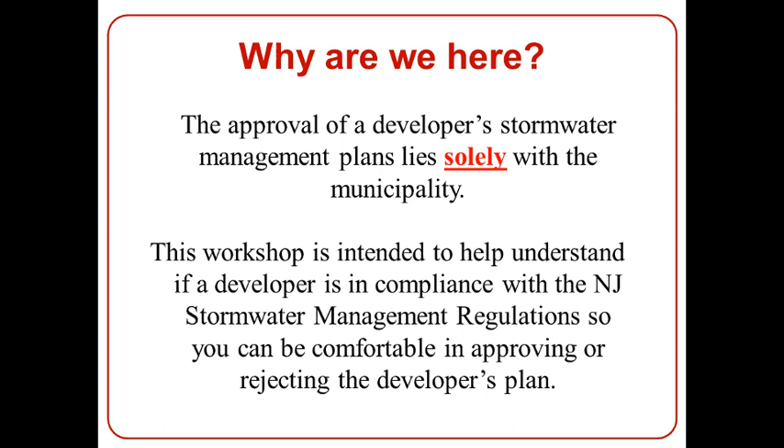Like I said, I'm with Rutgers Cooperative Extension. We've been around for about 100 years. Rutgers University is a land-grant college for the state of New Jersey. That's something Abraham Lincoln created in the 1860s. They gave large chunks of land to universities across the country so they could better teach agricultural and mechanical arts. Rutgers competed against Princeton, and not only did we beat them in the first football game, we beat them out on this too and became the land-grant university.

About 20 years later, we realized that we did not know how to be better farmers, so we started the Agriculture Experiment Station so we can do research on how to be better farmers. And then around 1914, we realized most farmers don't go to college, they farm, so we formed the Cooperative Extension Service. The idea is to extend the knowledge of the university out to the people of the state.

We have an office in every county, and the idea is that you can go to the county office. If you were a farmer and had a bug on your potato, you could go to the county office, and that county agent would explain to you how to deal with that. If they didn't know, they would come to the university, and we would do research and figure out how to deal with the problem. Now, over the years, we stopped growing corn and started growing houses, so now we're more of an urban-suburban as well as agricultural cooperative extension service. So we serve all of New Jersey, not just the farmers.

I came to Rutgers about 17 years ago, and I started the Water Resources Program. Our mission is to identify and address community water resources issues using sustainable and practical science-based solutions. As you know, every mission statement must have as many buzzwords as possible in it, and that has them all.

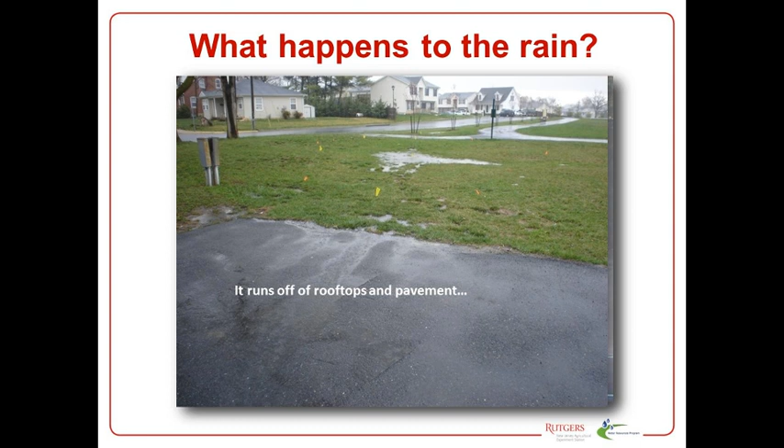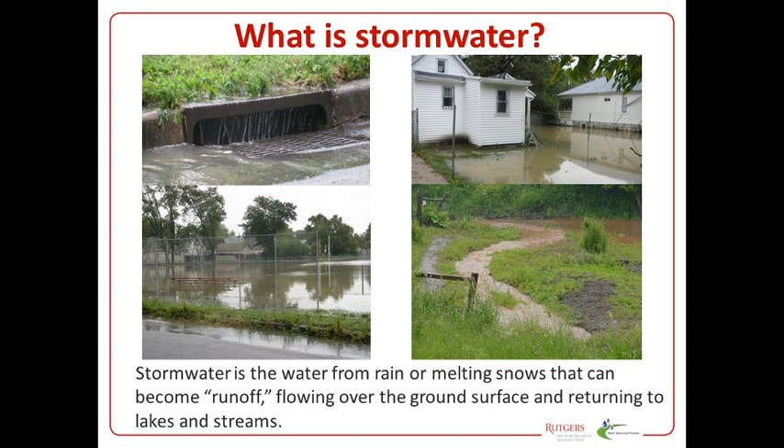Stormwater runoff is basically water from the rain or melting snow. That little stream in the lower right-hand corner is a little tributary by my house in Hillsborough. It's usually a little trickle of water unless we get a little bit of rain - then it becomes this muddy mess carrying water out to the Royce Brook. These are things we're trying to avoid.

We talk a lot about the hydrologic cycle, the water cycle. Our kids learn this in 4th grade - they learn about how water is cycled through this cycle. We can't create or destroy water; it's just there, transforming how it appears in our environment. We often explain to the kids that the water they're drinking is the same water the dinosaurs peed in millions of years ago, and kids tend to get a kick out of that.

But we've changed this water cycle. We've added lots of development. Under a natural, wooded, forested condition, we get about 10% stormwater runoff. As we add single-family homes on 1-2 acre lots, we get about 20% runoff. As we add more dense development, quarter-acre or half-acre lots, we get 30% stormwater runoff. And then when we get to downtown New Brunswick or some of our bigger cities, we get about 55% runoff.

New Jersey gets on average about 44 to 45 inches of rain a year. The climate is changing - that's real, it's not a myth. And that number is expected to go up to 48 to maybe 50 inches a year as climate continues to change. So we will get more water in New Jersey.

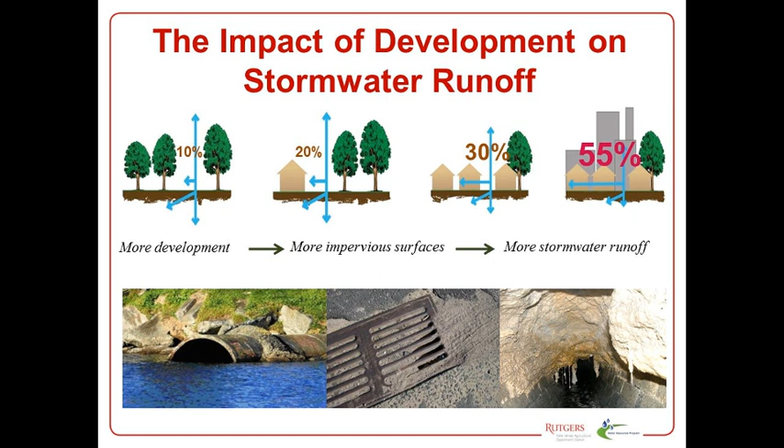As we add more impervious surfaces, we get more stormwater runoff. An impervious surface is any surface that water won't pass through - the roof of a building, a roadway, parking lot, sidewalks, even the very compacted lawns we see in some retirement communities along the Jersey Shore. Although it looks like grass, it's so compacted water can't get through, so it effectively becomes an impervious surface. This is something we really worry about, because impervious surfaces provide areas for pollutants to accumulate, and when it rains, it carries this pollution off.

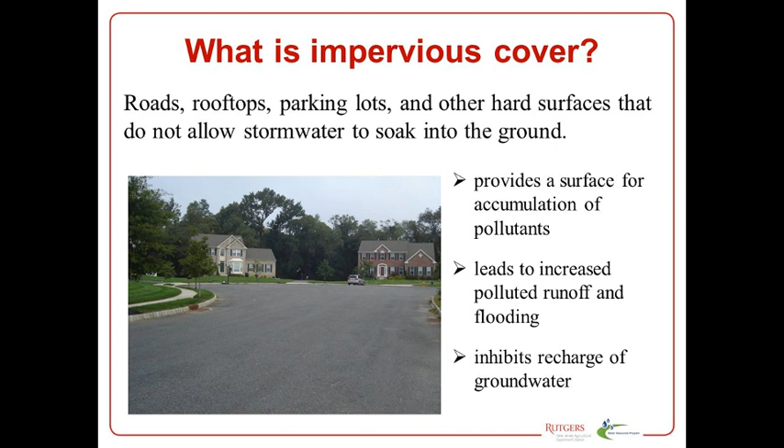Also, very importantly, it inhibits groundwater recharge. About 50% of the water we use in this state comes from the ground, so we're trying to get water back in the ground. If we don't get water back in the ground, we don't have water to irrigate our crops, we don't have water to drink, and we don't have water to feed our streams in the summer months when it gets very hot and we don't get a lot of rain. So that's very important to think about.

So as we change our landscape, we add more impervious cover. These are some of the things we see: more stormwater runoff volumes, higher peak flows, a lot more non-point source pollution, which is pollution that runs off the land, and less groundwater recharge. So these are things we're trying to avoid.

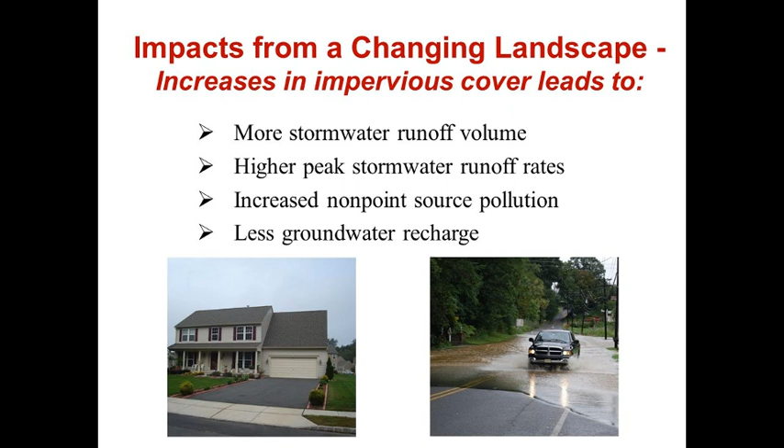So by adding those impervious surfaces, we've created a new water cycle, an urban water cycle. We get much less infiltration and much more stormwater runoff. And now we're trying to figure out through stormwater management how we can reduce that runoff and get more infiltration into the ground.

And that's a lot of what our stormwater regulations are written about. The current regulations were passed in 2004. There are new regulations expected to come out after the new year. They're the same requirements in the regulations. The only difference is how we're going to manage stormwater. They're going to require more green infrastructure to be used to manage stormwater, so things aren't going to change all that much except for the practices that are put in place to manage the runoff.

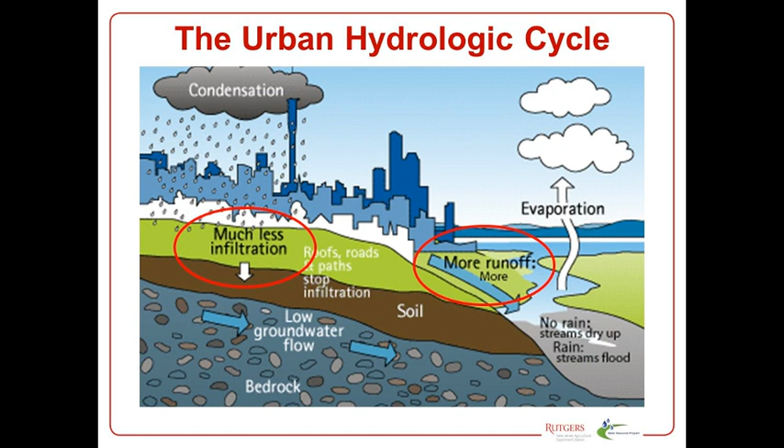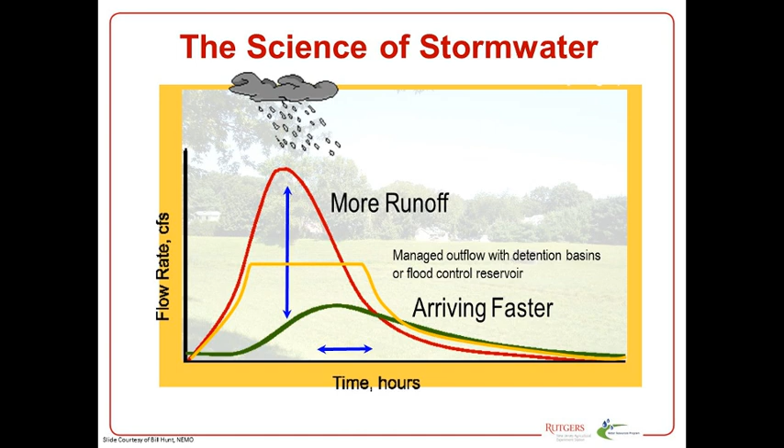Okay, so I think we're okay, right?

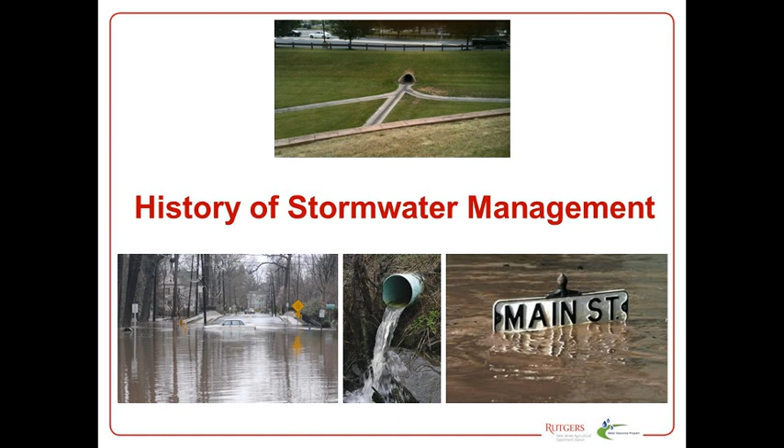It doesn't take much water to flood those bridges out, but 2 or 3 inches of rain and you see cars floating away. It's not unusual in New Jersey, okay?

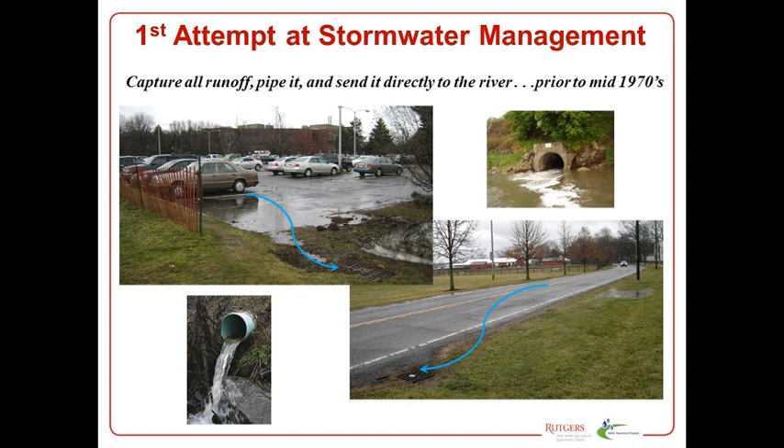So the first attempt at stormwater management was to grab the water and throw it in a catch basin and pipe it into the river directly. There's no storage, there's no holding it back. Let's hurry it downstream and let the next town downstream worry about it. So if you're in Hillsborough or Montgomery Township in Somerset County, we let Manville worry about it, or Bound Brook. So this was the original concept: hurry up and get it away, taking into no account what our downstream neighbor might experience because of our stormwater runoff and how we manage it. That's part of the issue.

The second iteration, we decided to create these big, beautiful detention basins. The idea of a detention basin was to grab all the stormwater runoff, hold it, and let it out slowly. So we took a 50-acre farm or 50-acre woodland, put houses on it with lots of pavement and rooftops, increased the amount of stormwater running off that area, and then put it in the basin and let it out slowly.

So the basin does not infiltrate stormwater. Most of these basins are very compacted, so very little water gets infiltrated. It just holds the water and lets it out slowly to prevent that peak from flooding downstream.

Most of these basins are designed for the 100-year storm, which is about 8 inches of rain over 24 hours. The 100-year storm does not come once every 100 years; the chance of getting it this year is 1 in 100. It's more of a probability thing. So this is why we get the 100-year storm every few years, because we're just a very unlucky state, I guess.

So the idea with these basins was to hold the water and let it out slowly. Somebody started worrying about mosquitoes, and they said if we have standing water for more than 72 hours, mosquitoes breed, and we'll have serious health effects.

So somebody decided we're going to put in these concrete low-flow channels. The bottom of this basin is graded at about 0.5%. It's very hard to grade soil at 0.5%, but New Jersey is the concrete king of the world, and we can pour concrete at 0.5% all day long. So we pour these little concrete low-flow channels in there.

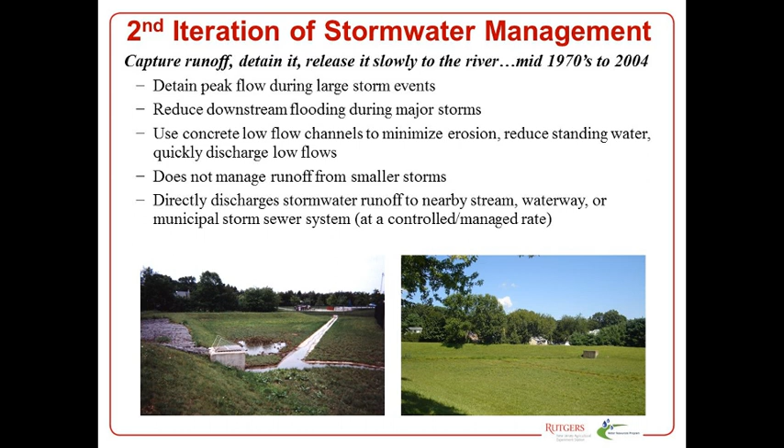So these became a big issue in New Jersey, and a lot of towns are trying to get rid of these right now. So the third iteration came out in 2004.

Regulations came out—there were two sets. There was a stormwater permitting regulation and a stormwater management regulation. The stormwater permitting regulations are often referred to as the Phase 2 regulations, or the MS4 permit.

The four S's: M stands for municipal. The four S's stand for stormwater, storm sewer system, separate storm sewer system. That's the four S's.

So the idea is that every town in New Jersey, all 565 towns, has a permit for their stormwater system—for the piping in the road, the ditches on the side of the road, anything that moves stormwater around their town.

These are the permits that require you to do street sweeping, to clean out your catch basins. These are the permits that require you to adopt a pet waste ordinance and a don't-feed-wildlife ordinance. So these are those ordinances.

The other thing that was passed was stormwater management regulations. The idea with this was that we were required to manage stormwater from any major development. Major development was defined as any development that disturbs more than 1 acre or adds a quarter acre of impervious cover.

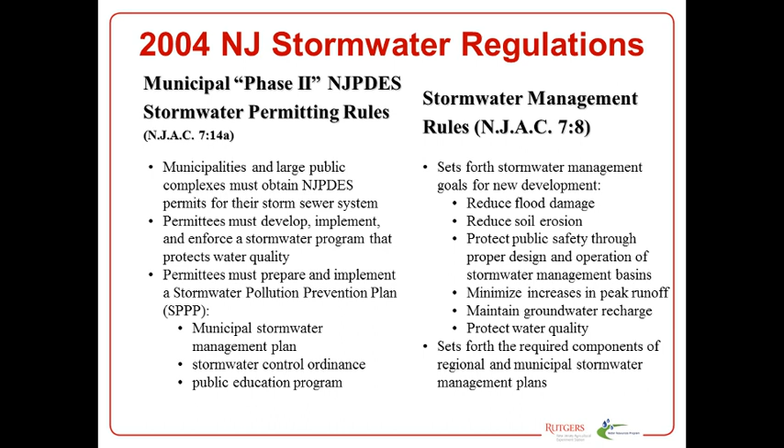But the new regulations do not change the definition of major development. It's still disturbing 1 acre or adding a quarter acre of impervious cover. You're still required to do all the things required in the earlier regulations. The 2020 regulations just ask you to do it a little differently, mainly with green infrastructure, and we'll talk more about that in a minute or two.

So the third generation—this one came out in 2004. Not only are you required to manage these peak flows, but you're required to maintain groundwater recharge and reduce pollution to our local waterways.

The idea was you're required to maintain 100% of your annual average groundwater recharge. So if you had a 50-acre wooded piece of land that was recharging 1 million gallons of stormwater a year, after you put up all your townhouses, it needs to still be recharging 1 million gallons of stormwater a year.

It also requires you to remove 80% of the sediment, the total suspended solids. So any runoff off the property, you have to filter and make sure no sediment leaves the property. So those were the two additions to the regulation.

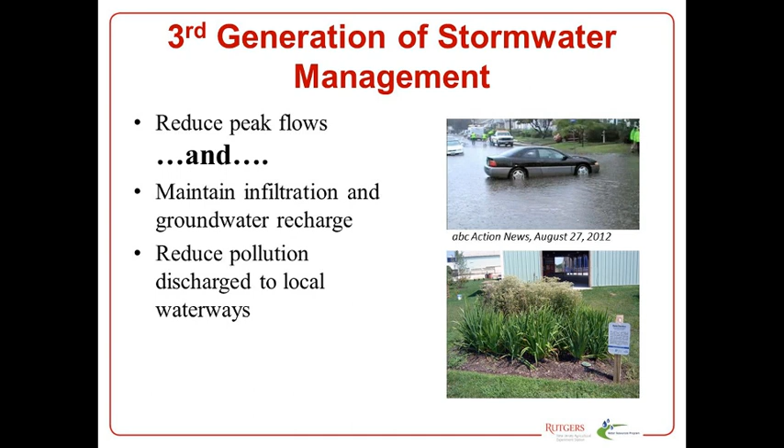So not only just dealing with water quantity, but we're dealing with water quality and groundwater recharge. So how do we do that? Well, we have a video here that kind of shows that.

This is a video from the American Society of Landscape Architects. Hopefully I'll be able to get it to work. So let's see how this works here.

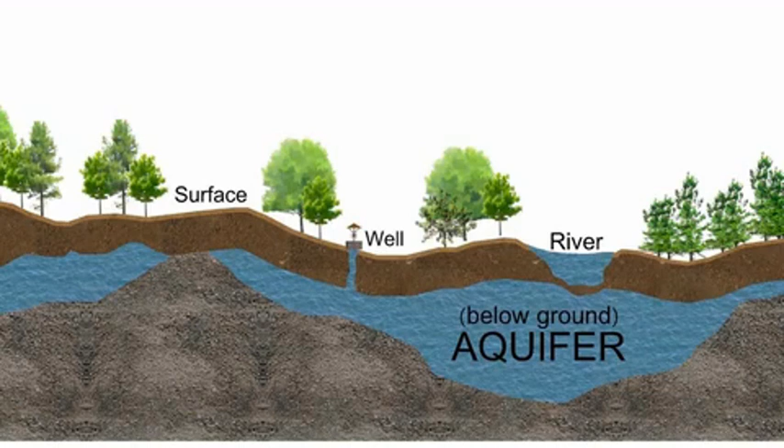Landscape architects design ways to divert and collect rainwater to prevent damage and replenish the aquifer. An aquifer is a below-ground natural reservoir of water that we use for drinking, cooking, bathing, and irrigation. The animation will demonstrate how rainwater is managed on a university campus plaza.

The plaza surface—I guess you guys can't hear that, can you?

Materials: concrete defines the walks and steps, and sod and lawn make up the open space. The building's roof, which also collects and discharges water, is a plain solid surface. Storm sewers and drains are ready to catch and pipe water away from the site and prevent flooding.

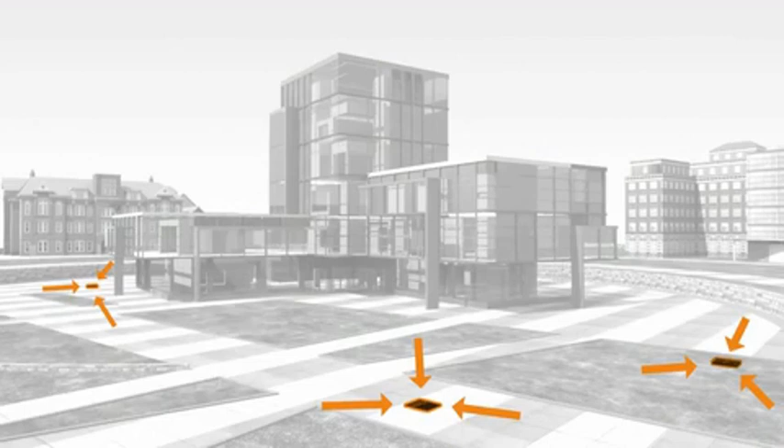Oh, they can hear it?

During heavy rainfall, these materials, like concrete and sod, can only absorb so much water. The excess rainwater on the surface is funneled into the storm sewers.

The building's roof diverts most of its water down pipes into storm drains as well. All this excess water, called runoff, can overtax and cause the storm drains to back up. This causes water to collect in ever-expanding pools. Too much runoff due to heavy rains can cause damage and sometimes catastrophic floods. It also results in more polluted, untreated water entering the aquifer.

There are more effective means to manage stormwater using sustainable systems and materials that prevent flooding and replenish the aquifer. The first system is a green roof placed on top of a building.

The green roof is layered with drainage materials, compost or planting soils, and vegetation. The green roof can absorb some of the rainfall, reducing the amount of water flowing into the storm drains.

Another system involves porous pavement. Concrete surfaces are replaced with individual concrete bricks called pavers. Each paver is interlocked with its neighbor and separated by permeable material. The permeable material is composed of small crushed rocks, also called aggregates.

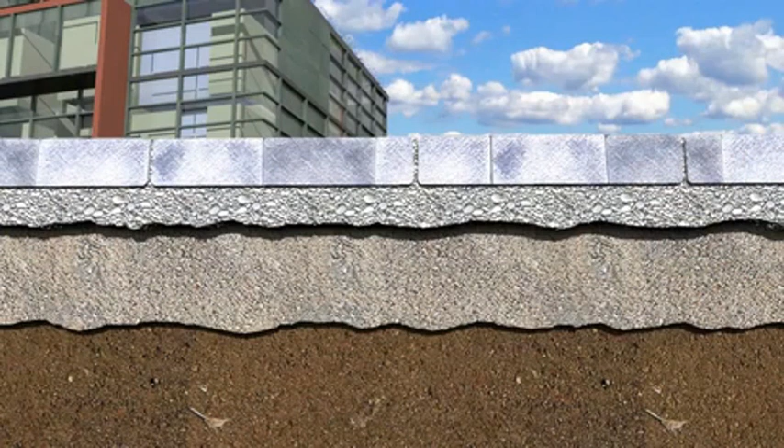Zooming into the cross-section, we see the permeable aggregates between and below the pavers. The aggregate-filled space acts as a sponge, absorbing water downward, diverting a good amount of runoff from the storm drains. The diverted water will eventually make its way into the aquifer below ground.

The third system is called bioretention and is also known as a rain garden. A rain garden is a swale or channel that absorbs, holds, and slowly releases excess water. A rain garden section is composed of compacted soils defining the depth, width, and slope of the swale, sand and drainage materials, plant soils, and vegetation native to the region. Rain gardens are not only aesthetically pleasing, they also restore wildlife habitat.

Now when it rains, water does not collect into large pools. Instead, our three systems absorb and redirect the excess runoff. The green roof prevents a lot of water from entering the storm system or hitting the ground. The porous concrete pavers absorb some of the rainwater and direct it downward into the aquifer. And the rain garden accumulates the remainder of the rainwater, preventing flooding and damage.

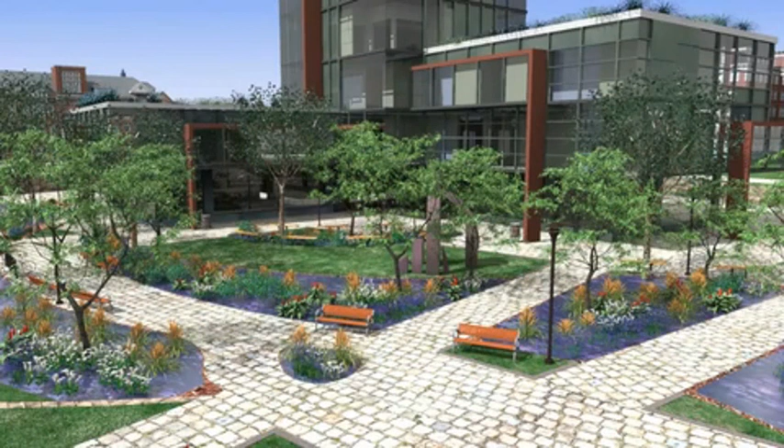As part of its function, the rain garden slowly releases rainwater into the aquifer over a 24-hour period. Just as important, the vegetation acts as a natural water purifier, absorbing pollutants and toxins from the water. Water is in high demand and shortages are common. These three systems are able to capture and treat more water than typical stormwater mechanisms. The systems are effective, easy to implement, and contribute to a more sustainable water management practice.

Okay, let's talk about this video for a second. I know some of you on the phone could not hear it. We will make it available to you to look at.

The whole concept here was that they talk a little bit about how a college campus is typically developed, and the idea is that we can better manage stormwater. So they talk a little bit about a green roof, which is one of the green infrastructure systems that we recommend people use for new development. A green roof will hold about a half inch of rainwater on the roof before it gets to the ground, and the plants on the roof will use that.

It talks about bioretention systems, which are also known as rain gardens. These are landscape features that are actually designed to capture the rainwater that's running off and hold the water and filter the water and infiltrate the water into the ground. And then it talks about permeable pavement. In this case, it talks about the paving stones.

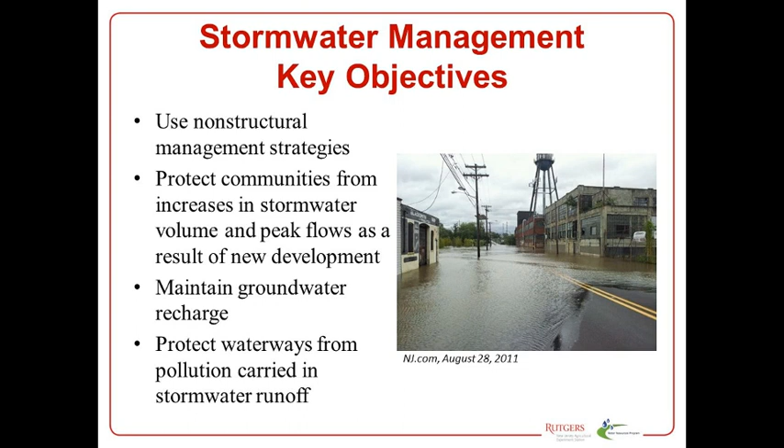So the stormwater management objectives—there were really four objectives with this. One was using non-structural management strategies, thinking about how to better manage the water without having to build too many things. Protecting communities from increases in stormwater, which is really about flooding issues, maintaining groundwater recharge, and also filtering out pollution. That's the other component of the regulations.

None of that has changed with the 2020 requirements. This talks about major development, which we discussed earlier—disturbing 1 acre or more, or increasing impervious area by a quarter acre. If you do that, you have to comply with these regulations. And you'll notice, once again, non-structural strategies, quantity, recharge, and quality.

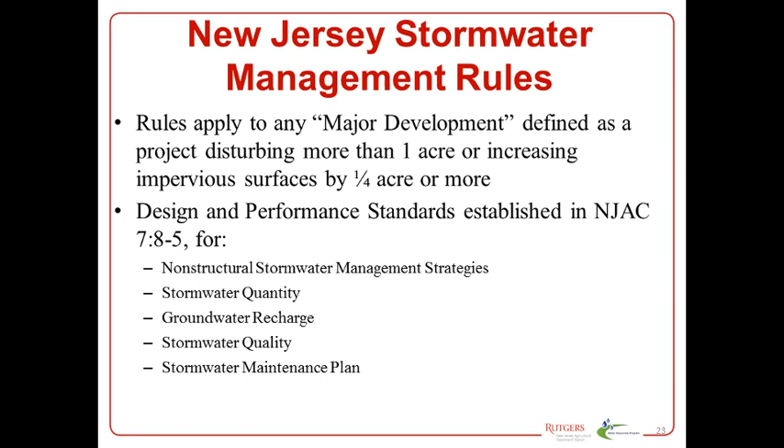The other bullet here is a stormwater maintenance plan. Anything you build to manage stormwater, you have to provide a maintenance plan for, so that whoever owns and operates that facility knows how to take care of it and make sure it's being properly maintained. We know that if things aren't maintained, they tend to stop functioning in every walk of life.

Somebody wants to know, is there a concern in parking lots that allow infiltration that pollutants will be conveyed into the groundwater table? That is a concern at times. Typical parking lots where cars are parked usually aren't too much of a problem—even if cars leak a little oil, usually that's not an issue. We tend not to promote infiltration from very dirty places, like where they keep school buses, or where the Public Works Department keeps their trucks—any older vehicles that might be leaking fluids, or heavy-use vehicles. We do not encourage infiltration from those places.

Actually, it's not allowed in the regulations to infiltrate from those places. So, for example, you're not allowed to infiltrate from a gas station. That's another aspect of it.

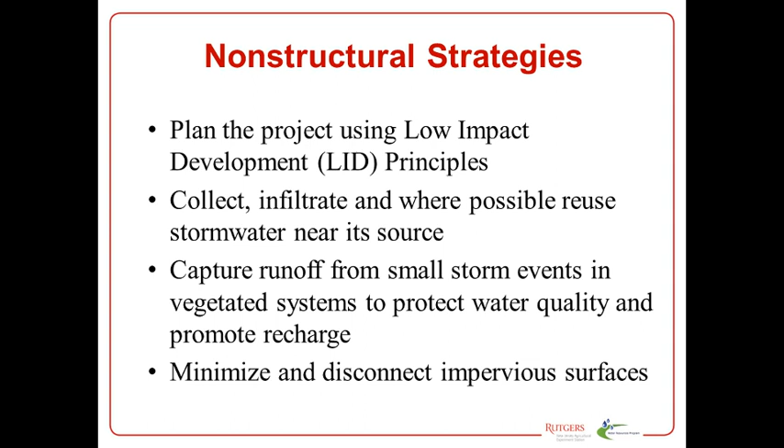Capturing runoff from small events is another issue, using vegetative practices to do that, and minimizing and disconnecting impervious surfaces. We'll talk more about disconnection—it's a very powerful tool that we don't use enough of in New Jersey.

Water quantity regulations have not changed—these have been the regulations since 2004. The idea is we're going to control post-development runoff for the 2-year, 10-year, and 100-year storm events. In other words, we calculate how much stormwater runs off before we develop.

So for the 2-year event, that's about 3.3 inches of rain over 24 hours. A 10-year event is about 5 inches of rain over 24 hours, and the 100-year event is about 8 inches of rain over 24 hours.

So the BMPs for the 2, the 10, and 100-year storm talk about reducing the peak flow. For the 2-year storm, it's a 50% reduction. The 10-year storm is 75% of the peak. And for the 100-year storm, it's 80% of the peak. So for the 100-year storm, if 100 cubic feet per second is your peak flow off the land, after you develop it can only be 80 cubic feet per second. You really have to do a job of managing this.

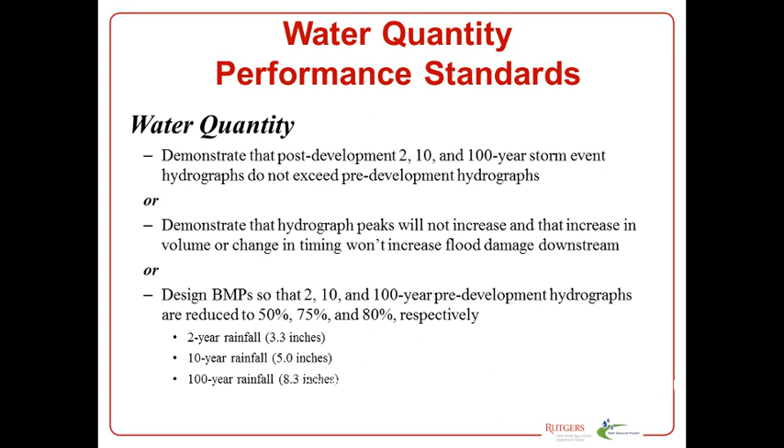There's a lot of questions about green roofs that we'll get into a little bit later as we go on. So, groundwater standards: maintain 100% of your average annual groundwater recharge.

This is a pretty simple thing. If you're recharging 1 million gallons of stormwater before development, afterwards you need to be recharging 1 million gallons of stormwater. The second requirement talks about the 2-year storm, measuring pre-development versus post-development. Usually the second calculation gives you a larger volume of stormwater to recharge, so most people who do these calculations use that first requirement, maintain 100% of their average annual groundwater recharge.

There's a question about whether the developer is held to reduce the peak flow or simply not exceed pre-development. No, they are required to reduce the peak flow. For the 2-year storm, the post-development peak has to be 50% of the pre-development peak. For the 10-year, it has to be 75% of the pre-development peak, and for the 100-year, it has to be 80% of the pre-development peak. So you are reducing it. You've got to keep in mind you're getting a lot more stormwater runoff after post-development because you're adding so much impervious cover.

Another question: do you know the years that most recent rainfall annual increase of 8.3 inches came from? I do not. This is something where the new rainfall totals were calculated by NRCS, the Natural Resource Conservation Service, and the Soil Conservation District. This was done about 10 years ago, and they tried to go back as far as they can, but I think it's probably 30 or 40 years. I'm not really sure what the exact numbers are.

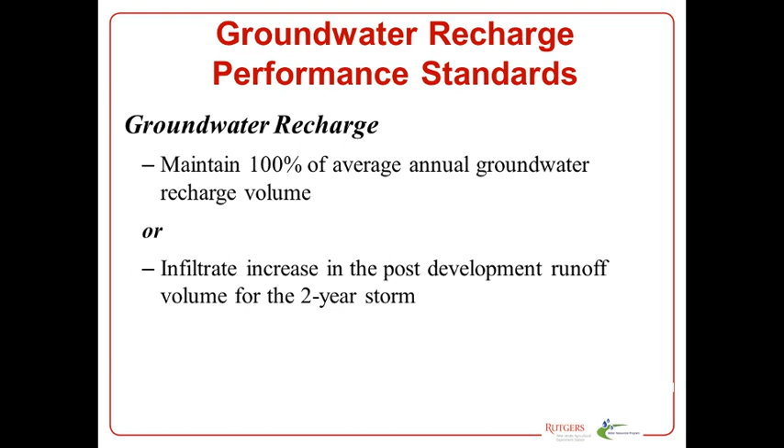So the last one is water quality. You need to install a best management practice to reduce at least 80% of your total suspended solids load, and you must provide nutrient removal to the maximum extent feasible. Originally when they talked about these regulations, they had numbers for how much sediment, nitrogen, phosphorus, lead, and zinc you had to reduce. Then somebody realized that if you design things to remove sediment, it'll also remove all those other things. So the New Jersey DEP came out with a Stormwater Best Management Practice Manual that tells you how to design these different systems, and they rated the systems for how much total suspended solids, or TSS, they'll remove.

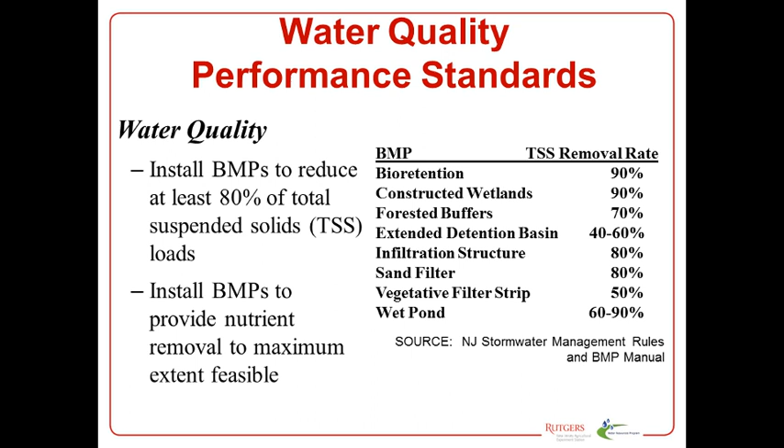A lot of people ask, what is the maximum extent feasible? Well, that depends who you are. If you're a developer, the maximum extent feasible may be a much lower number than if you're an environmentalist. So that's always been a question that we've had. That terminology comes from EPA, and it's been very difficult to get a real calculation of what that number should be.

So we do have guidance for this: the Stormwater Management Manual, the BMP manual on the right, and the Tier A Municipal Stormwater Guidance document. So the Tier A is the permit. For Tier A communities, there's 2 permits, MS4 permits, stormwater permits that towns have. Tier A is for the more developed towns, Tier B is for the rural towns.

There are 99 Tier B towns. The rest of the 565 municipalities are Tier A municipalities that have to achieve much higher requirements of what they must do. The municipal stormwater management rules, or permitting rules, are the ones that require towns to pass a stormwater control ordinance and to manage stormwater from any new development or major development.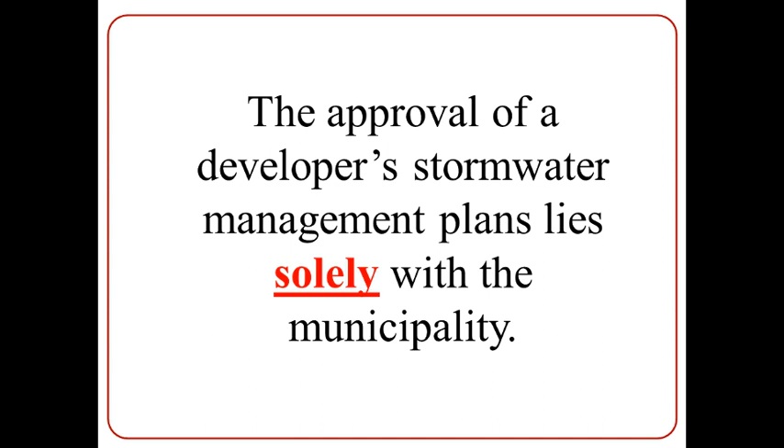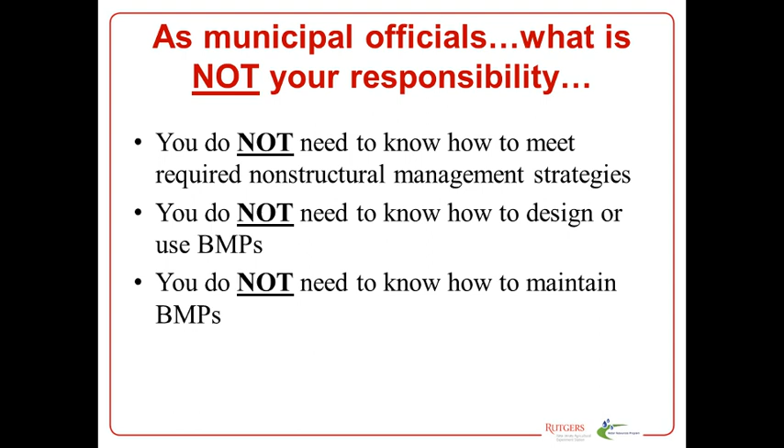So let's move on with this. Okay, so this is an interesting thing. As municipal officials, what is not your responsibility? You don't need to know how to meet the required non-structural strategies, design stormwater practices, or maintain a practice. But you do need to know that you're responsible for ensuring that all major developments are compliant with the regulations.

Originally, when we started doing this, New Jersey DEP asked me to teach all of you how to be engineers. But most people go to college for 4 years to do that and have to practice for quite a while to be an engineer. It's kind of silly trying to teach people who are volunteering with a wide range of backgrounds how to be an engineer. So the best we can do is teach you how to ask the right questions. That's what we're trying to accomplish here.

So if you allow development to go in and it doesn't comply with these regulations, the town is liable. We've seen this happen in one town where they let development go in, they weren't satisfying the groundwater recharge requirements, and the town had to come in and fix the system. The developer was long gone. Most developers develop a piece of property under a company name. After the property is developed, they get their bond back, dissolve the company, and start another company for the next development. So if something goes wrong and a township approves a development that didn't comply with the regulations, it's hard to go back after the developer.

So in this case, the town had to go in and spend $250,000 to redesign the stormwater system, and a lot more money to actually reconstruct it. That was all at taxpayer dollars because they didn't make the developer follow the regulations. So the taxpayer got the burden of that, which is what we're trying to avoid. Okay? So...

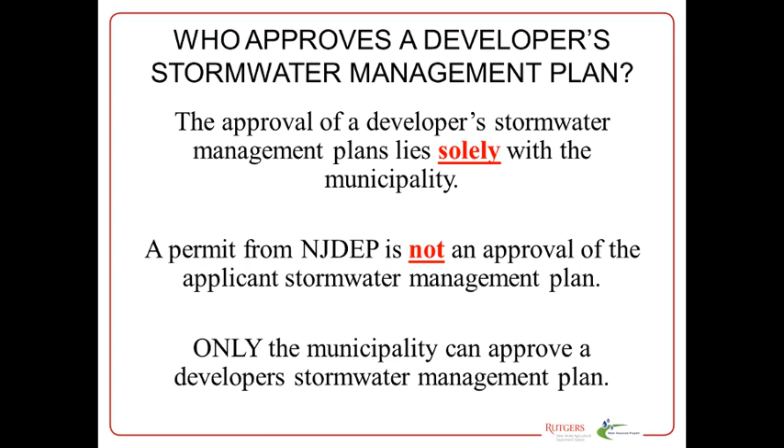You will often see an attorney come in for a developer waving paperwork around, saying 'Look, I got my DEP permit, you don't need to look at my stormwater stuff.' That's incorrect. You still have to review their stormwater permit, their stormwater application, and their plans, and make sure it complies with the state regulations. If it doesn't, DEP won't be held liable. You as a town will be held liable.

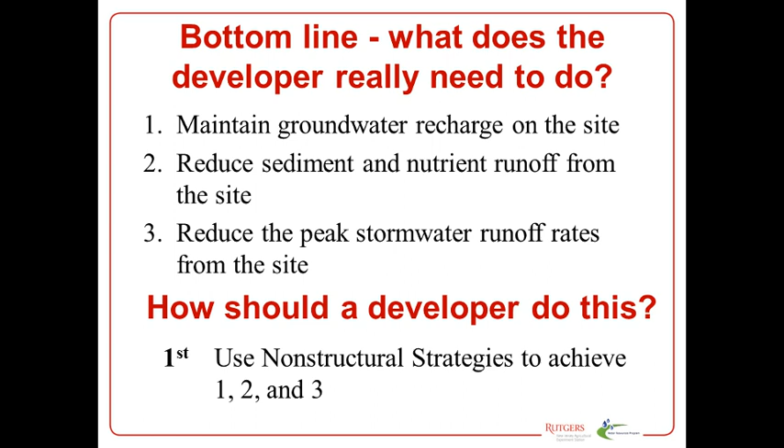So we start thinking about how to do this. The first way is we look at how a developer needs to approach this. First we often look at maintaining our groundwater recharge, because in doing that we can reduce our sediment or nutrient reductions and our peak flow reductions. The first step is to use non-structural strategies.

This component is being replaced by the new stormwater regulations coming out in 2020. So these non-structural strategies are still in there, but the state is saying that by using green infrastructure, you're complying with these strategies, which some people agree with and others do not. But these are very straightforward things when you start thinking about them, okay?

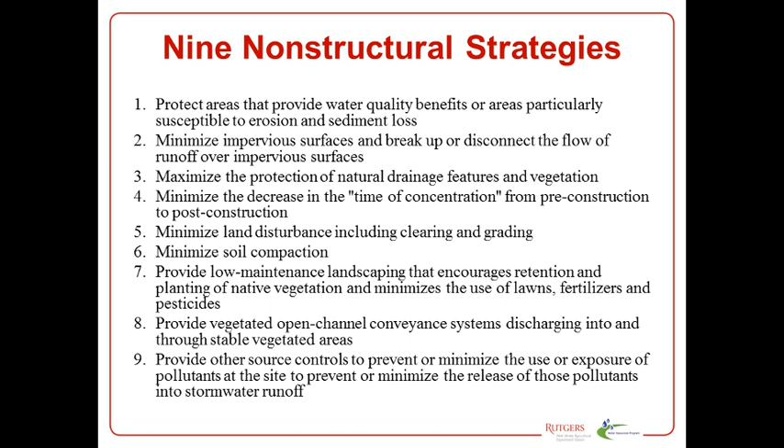We'll go through some of these pretty quickly so you can see what we're talking about. We can break these 9 strategies down into 4 categories: vegetation and landscaping, maintaining or minimizing site disturbance, managing our impervious cover, and reducing or slowing down the runoff, or reducing time of concentration. So it's really about slowing down how quickly the water leaves your property. That's what number 4 is.

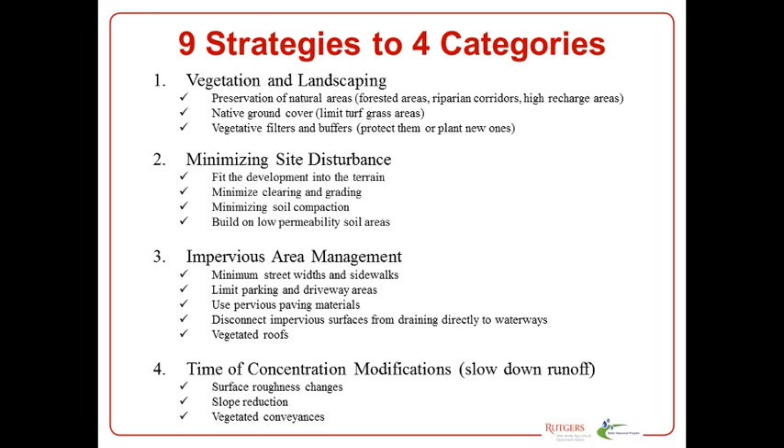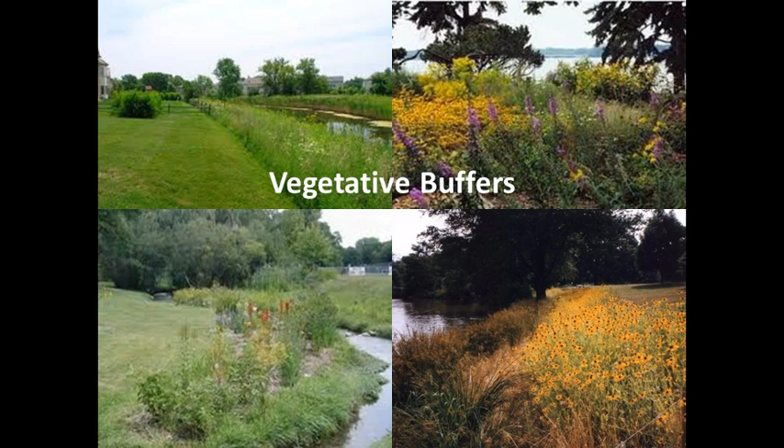Okay, so the first one is protect areas that provide water quality benefits. We often see vegetative buffers along streams. We're trying to protect these areas, not disturb them, keep development out of them, which is very important. There are regulations that prevent you from developing within certain proximity to a stream, depending on where you are in the state. Some are 300-foot buffers, some are less, but we do have required buffers around our streams.

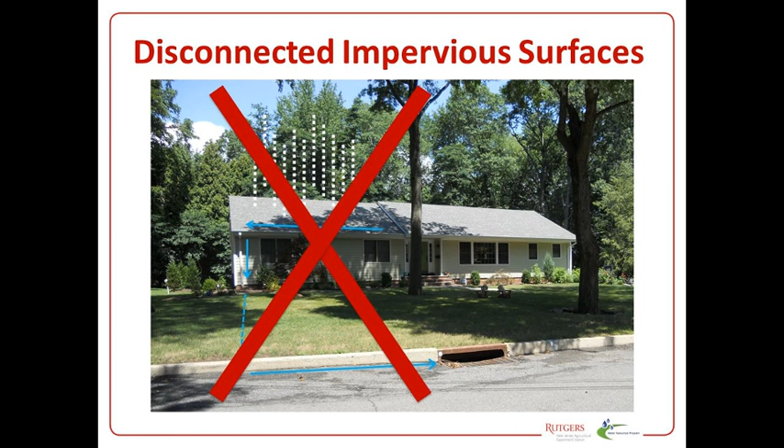One way to disconnect is to use a rain garden or bioretention system. The water can go into this landscape feature and slowly infiltrate into the ground. A rain garden is 3 to 6 inches deep with some ponding water. It can be designed to capture the first 3 to 4 inches of rain from that rooftop, whereas your lawn would only absorb maybe the first half-inch. So it's a much more robust system that does a much better job of managing stormwater.

This is a great example from New Jersey DEP, out of the Best Management Practice Manual. We have 1 acre of pavement, 2 acres of grassed or pervious area, and we get 1.25 inches of rain. That 1.25 inches becomes very significant in the state—we call it our water quality storm. Presently, 90% of the storm events we get come in storms less than 1.25 inches. As climate continues to change, that number is going to go up. We've yet to get a number from our climate scientists—they're unwilling to say it'll be 1.5 or 1.75, but they know it's going to increase.

So your 1.25 inches of rain hits the 1 acre of pavement, all runs off, goes to the road, goes to the inlet. That same rain hits the grassed area, and very little runs off. You get 28,500 gallons of stormwater runoff. As a municipality, the number one thing you're worried about is money, right? So how can we reduce this runoff by 85% for absolutely nothing, for free? You can't get any better than that unless I pay you to do it.

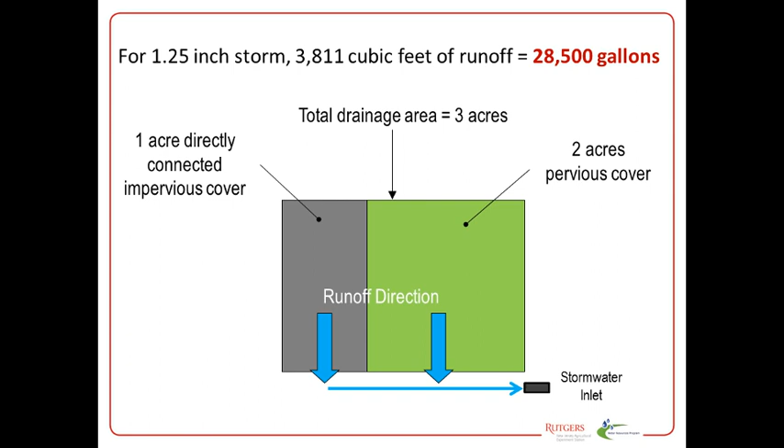What if, instead of having water run off the pavement, we have it run onto the grass or pervious area? When it rains, water will sheet flow off that pavement into the grass area. On a day like today, standing in a Walmart parking lot, watch how the water moves across the lot—as a sheet about an inch thick. When that sheet hits grass that's 2 or 3 inches high, it slows it down, filters it, absorbs it, and gives it a chance to infiltrate into the ground.

So now you've gone from 28,500 gallons of stormwater runoff to 4,360 gallons. It cost you absolutely nothing—you had to pave it anyway, you just paved it a different way. You thought about it differently, and ran the water onto that pervious area.

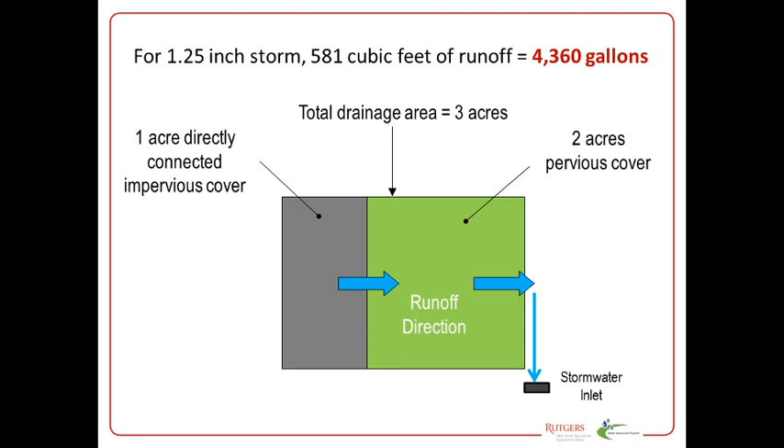So you've reduced that 1 acre parking lot to act like about 1/8 of an acre, cutting runoff by 85%. Now if the design storm is a 10-year storm, that's 5 inches of rain, and the percent difference only drops to about 15%—the grass area can't absorb 5 inches of rain from that parking area. But as I said, 90% of rainfall events come in at less than 1.25 inches. So 90% of the time, we can make that 1 acre parking lot look like 1/8 of an acre simply by changing how we pave it and where we send the water.

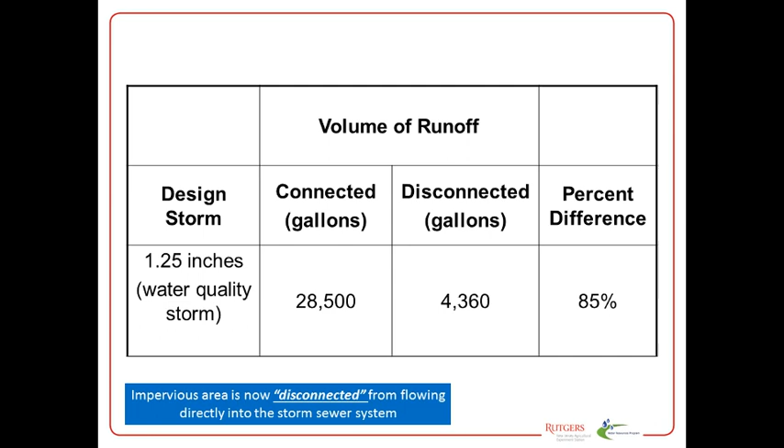Well, we need those big wide roads because people might come over at Thanksgiving or Easter and need to park in the road because my 150-foot driveway isn't big enough for them to park. So we need that big road for those two times a year.

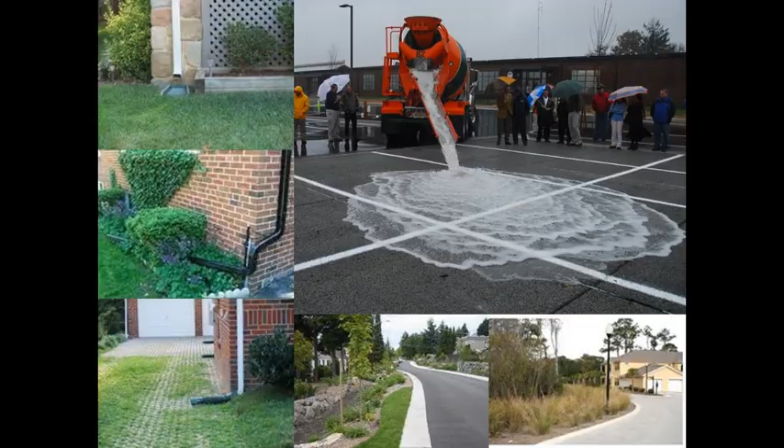You can see in the upper left-hand corner of this picture just a downspout disconnection. In the next picture down, they're running the water into the vegetative area along the house. Here they're running it onto a driveway that has grass and what we call grass pavers.

In this spot, we can see this is the EPA in Edison. They have porous asphalt there, pervious concrete, and do a lot of testing to show how it works. So these are ways we can change the pavement we use and disconnect these impervious surfaces.

Minimizing land grading is another thing we try to do. You can see preserving natural lands in the upper left-hand corner, and then what we typically do in New Jersey: clear cut it, put a road in, big houses, big lots, no open space. We try not to do that lower right corner, instead thinking about the upper left corner.

In the end, the houses on the upper left-hand side have a lot more value than the houses on the lower right side, because of the way they're configured and all the open space that's part of that development. So that's another way to think about clustering your houses.

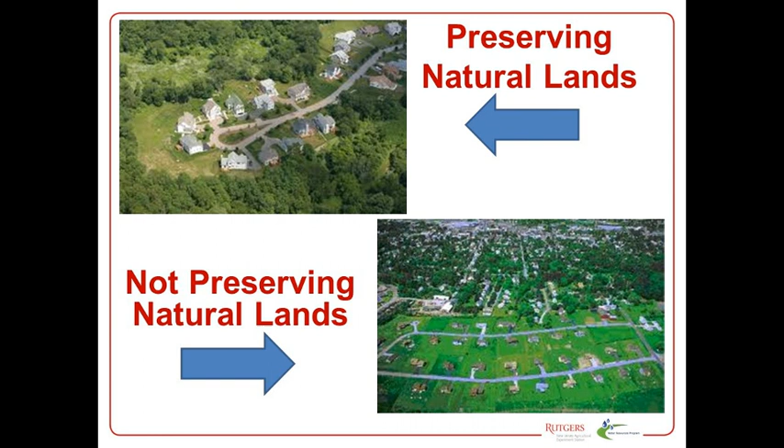Some of that requires township ordinances to be passed so that you can allow that to happen. A lot of towns would consider that weeds, fine you, and make you cut it down. So you have to consider what your town ordinance allows, and see if you can change the ordinance to allow a more natural area at your house. We've seen a lot of people do that.

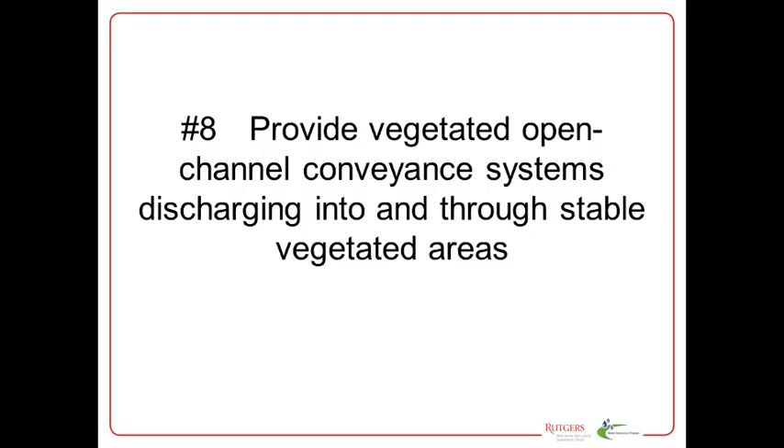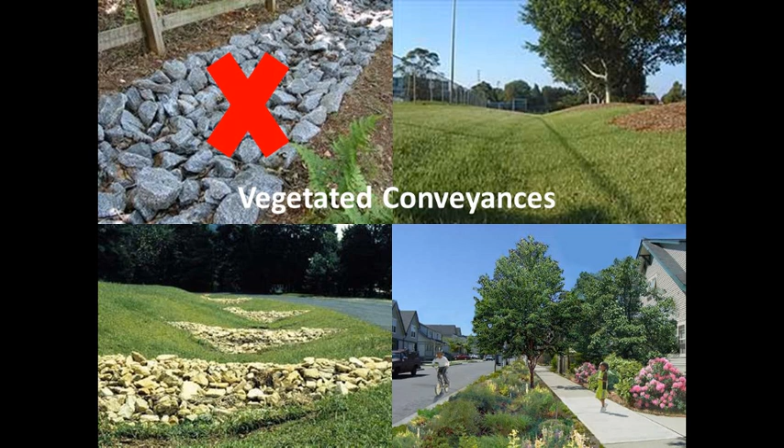What we don't like is the upper left-hand corner with all the riprap. It really doesn't help infiltration. It may stabilize that channel, but it's expensive and probably unnecessary, because that's not a very steep area.

So there's a checklist you can use to see if they've actually looked at these non-structural strategies. This is something we encourage towns to make sure they use. It's contained in the Best Management Practice Manual by DEP.

So the other thing we had done was we started talking about asking the right questions. So we have in here these checklists, and these are the questions that, if you answer no to any of these, then you're really not in compliance with the regulations.

The way this was set up, and we worked on this with New Jersey DEP quite extensively, was that as you're going through these questions, if somebody answers no, we're not telling them they can't develop. They have to go back and fix their development plan. We never tell people not to develop, that's not our job. Our job is to make sure they develop in an environmentally conscious way and follow the regulations.

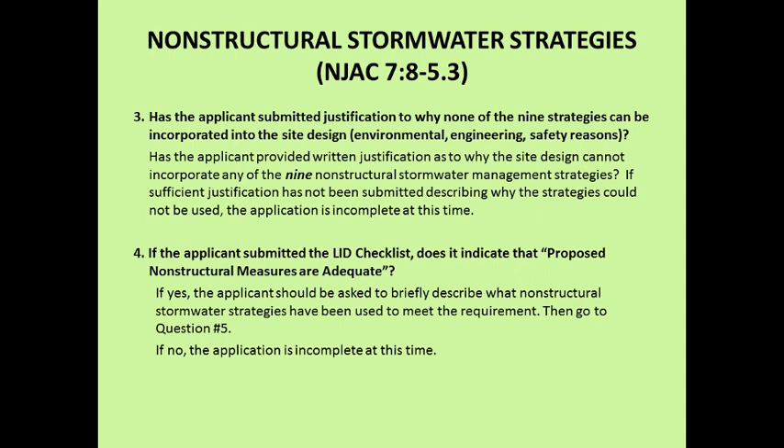You can see some of these questions in here. A lot pertains to the low impact development checklist I showed you, trying to make sure folks are complying with these nine non-structural strategies. A lot of times we'd print these out, give them to towns, and towns would post these on their website or use this as part of the development package and say answer these questions. If you answer no to any, you'll have to explain yourself.

You can see in this question, if no, the application is incomplete at this time, but it can be deemed acceptable contingent upon obtaining the appropriate deed restrictions. In this case, they want to make sure that if you're saying this piece of land is set aside to manage stormwater, then you have to deed restrict it, and that prevents the next property owner from coming in and eliminating that piece of land.

So if you have a rain garden in front of your property and development is considering that rain garden as managing stormwater from that property, it needs to be written in the deed that that land must always stay as a rain garden. Cost is not a reason for non-compliance - you didn't see that in here anywhere. The only reason to not use non-structural strategies is... let me see, we have that in here.

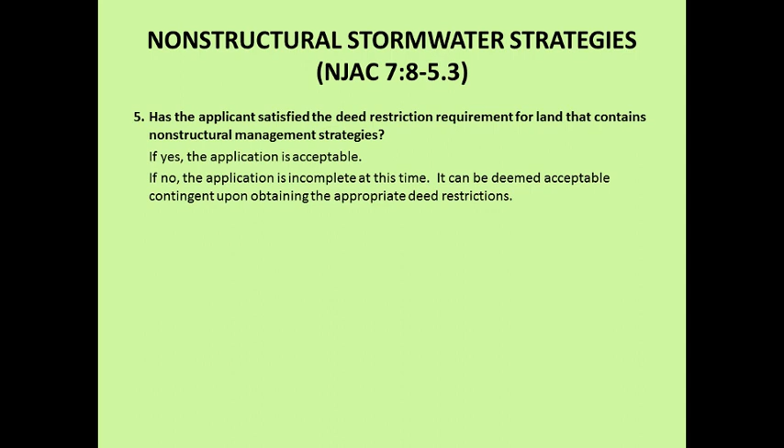So you can see on the bottom, the only acceptable reason for no is engineering, environmental, and/or safety reasons. Cost is not a reason. 'It's too expensive to do that' is not a reason. Okay.

So engineering - it won't work, it's too steep, we can't put a grass waterway in there even with check dams. Environmental - it's going to cause more issues than it's going to protect. Or safety - a lot of people don't want deep ditches in their backyard where kids might be playing, so that might be a reason to pipe that area instead of putting in a grass waterway.

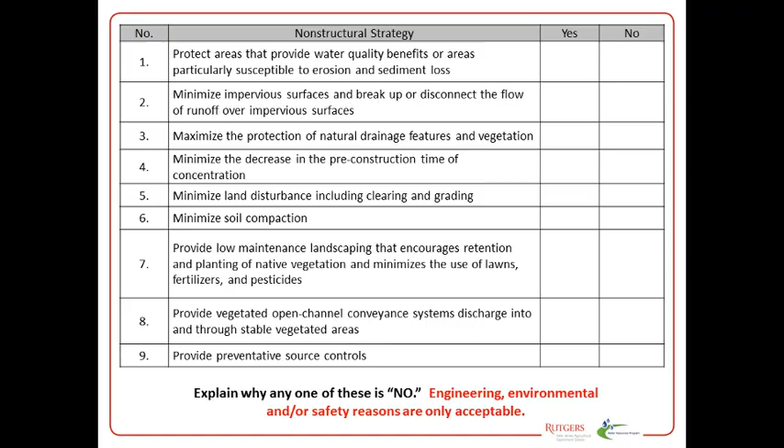These are things we think about, and a lot of developers say it's too expensive, and I'm sorry, but you've got to take that out of your profits. That's just the way it is, it's the regulations. So the next thing we do is focus on incorporating systems to address water quality and groundwater recharge.

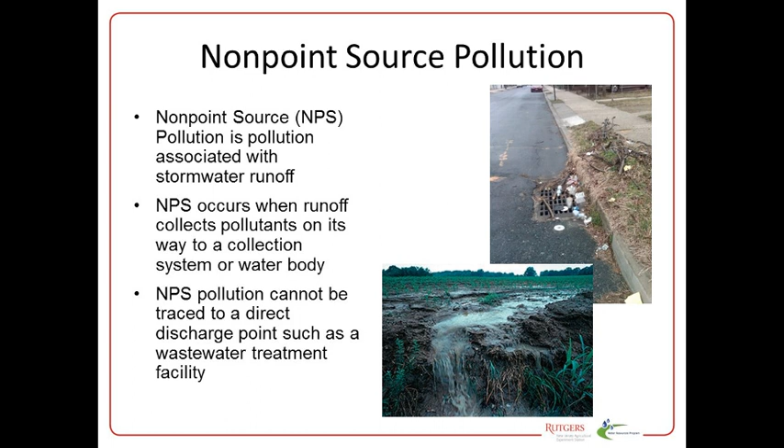We think about non-point source pollution and pollution that washes off the land. Nobody's running around New Jersey breaking thermometers in our lakes - the reason we have high mercury in our waterways is a lot of that settles out of the atmosphere because we're downwind of Ohio, where they burn coal and metals are released into the atmosphere, then settle out on our rooftops and pavement, and get washed into our waterways. These are areas where pollutants accumulate, and we need to protect them.

Lots of non-point source pollution - oil and grease from cars, petroleum hydrocarbons. That's the number one reason we can't dredge a lot of our waterways, because the concentration in the sediment in the lake is so high that the dredged sediments would have to be disposed of as hazardous material, and that's very expensive. Fertilizer, we put that on our lawn to make our grass grow.

When fertilizer gets into streams and lakes, it makes the algae grow. Algae is a plant, so during the day when sunlight's out, algae through photosynthesis take in CO2 and pump oxygen into your lake. At night, the algae respire and take in oxygen, and your oxygen starts to dip down in your lake. When the algae die, microbes come in to decompose them, and oxygen dips even further because those microbes use that oxygen during decomposition.

The trick is, too, the warmer the water is, the less oxygen it holds. So it's not unusual to have two or three weeks of very dry weather, wake up in the morning, look out at your lake, and see all the fish floating on the surface because the dissolved oxygen dipped below one part per million.

Animal waste, we do worry a lot about picking up after dogs. We're very good in the state about that, unless you're at the Jersey Shore. For some reason, every time I go down there, it seems like people take a vacation from working, but also a vacation from picking up after their dogs. It's kind of disheartening. But the animal waste we really worry about are the geese in the center picture there. Originally from Canada, they've recently relocated to New Jersey and live here all year long. The average lifespan of a goose is 26 years.

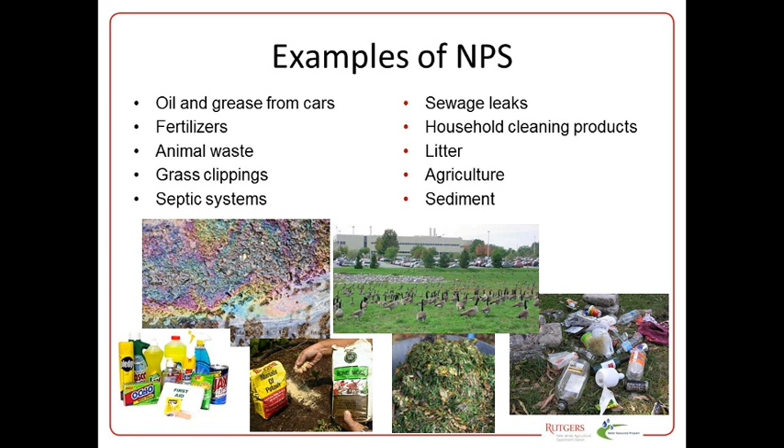Okay, so those are things we think about.

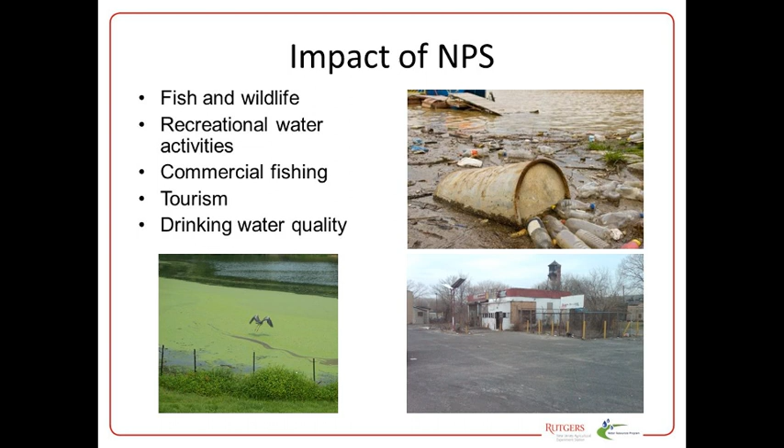So we think about impacts of non-point source pollution: fish and wildlife, recreation. We saw this summer we had these harmful algal blooms. A lot of nutrients got into these waterways, causing the algae to grow, and lakes are closed for recreation. Property values drop, economic distress sets in where restaurants are on lakes. Years ago, when we had trash washing up on the Jersey Shore, the same thing happened, right? A lot of tourism, a lot of economic impact is associated with unclean waterways. So we have to worry about that aspect of it.

So groundwater recharge is another piece. It requires healthy soils, right? Permeability and hydraulic conductivity are really the same thing—it's how fast water moves into the ground. Water has to infiltrate at least a half inch per hour for you to be able to put in a system designed to infiltrate stormwater into the ground. It can't infiltrate faster than 10 inches per hour because the water moves into the ground too quickly.

There needs to be a vertical separation between the seasonal high water table and the bottom of your infiltration system. And you have to keep it away from basements, foundations, and septic systems. You don't want to be infiltrating stormwater right next to your house and having it go into your basement—that could be a huge issue. So we try to keep any kind of rain garden infiltration system at least 10 feet away from a house with a foundation.

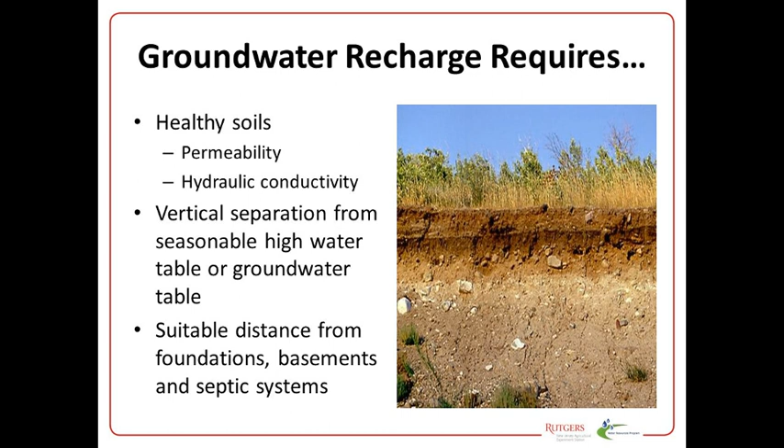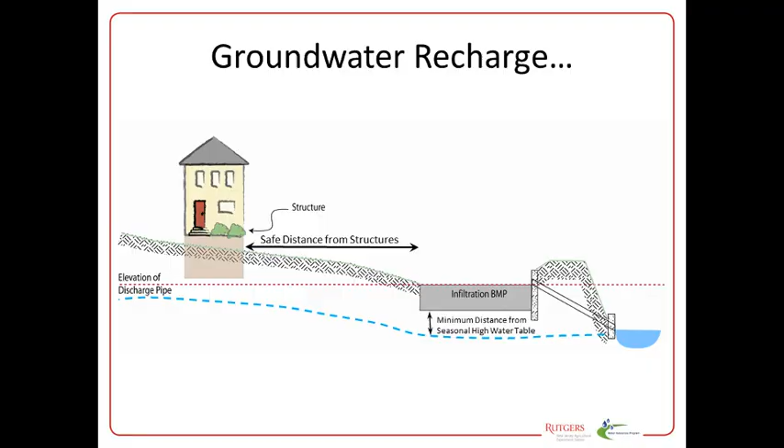Okay, so the number one system we'll see as we move forward with the 2020 regulations will be bioretention systems. Bioretention: bio means life, retention means a system that holds water. They're designed to capture water and slowly infiltrate it into the ground. The vegetation helps take up some of the nutrients. There's usually a mulch layer that allows microbes to decompose some of the pollutants. And as water moves into the soil, pollutants adhere to the soil and also get degraded over time.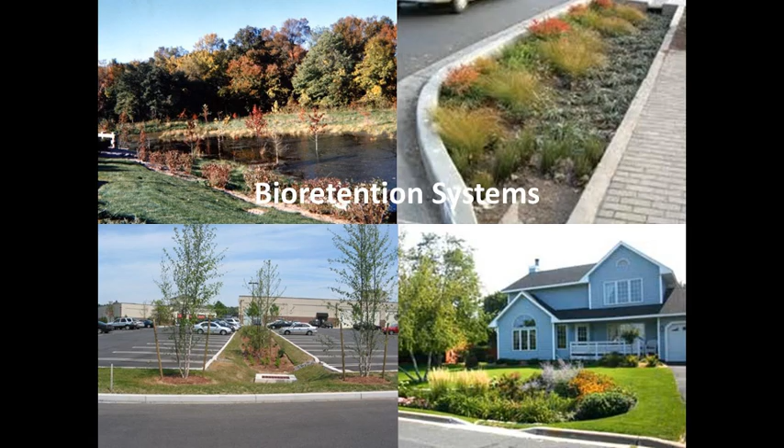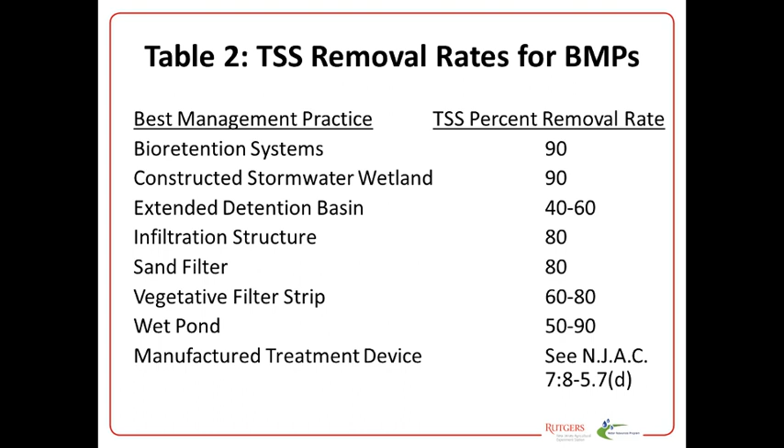In the regulations, the systems are rated. A bioretention system or rain garden gets 90% removal. This only works if you design it in accordance with the Stormwater Best Management Practice Manual. There's criteria for how to design each system. If you design it that way, you get the removal rate shown on the right-hand side of this table. If you do an alternative design, you won't get that removal rate — you'll have to justify what your removal rate is. The bottom one is pre-manufactured treatment devices, which vary in removal rates, and I'll show you what some of those are.

There are two types of systems. On the right is a hydrodynamic separator, also known as the swirly device. Water comes in, swirls around, sediment settles out in the middle, and clean water comes out. Those are rated to remove about 50% of the sediment. The one on the left is a filter system, like a Brita filter on your faucet, and that gets about 80% sediment removal.

These systems have to be approved by New Jersey DEP. There's a system called New Jersey Corporation for Advanced Technology that reviews all the data on these and certifies them, and then DEP approves that certification. There's a website where all these devices are listed. Somebody comes to you and says, well, I'm using the jellyfish, it gets 80% removal — well, the jellyfish needs to be one of the systems that is on that website, approved. You cannot allow a system to go in that has not been approved by New Jersey DEP.

These systems are often sold by people very similar to used car salesmen — buy my system, it's going to remove 90% of all pollution, it's going to be great. So that becomes another thing to watch for. I'll answer some more questions at the end as I keep going, if that's okay. There's a lot of stuff here that I'm beginning to look at. Let's go on a little further.

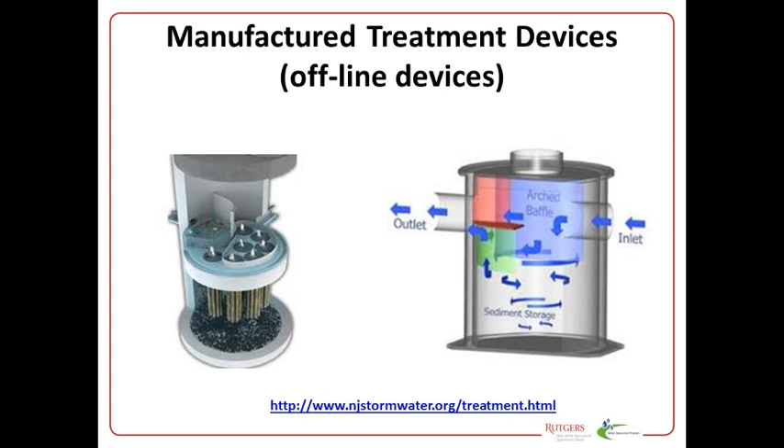There are some general stormwater runoff calculations we look at. Has the applicant demonstrated pre-construction conditions have been unchanged for the last 5 years? This is really interesting because some people have taken a piece of land and changed it so that the pre-development conditions are more developed than they were beforehand, so they don't have to remove as much stormwater — because going from a more developed condition to a major developed condition requires less stormwater management than going from a natural wooded condition to a developed condition. New Jersey DEP has caught onto that, and they put this in there.

If you don't know what it was pre-development, you're supposed to use wooded land use under good hydrologic conditions, which is basically the worst case scenario for a developer, because that's the nicest, least stormwater runoff compared to his development, which would be the most stormwater runoff.

The other thing people used to do is take impervious surfaces and pervious surfaces — grass area and paved area — and blend them together, modeling them as one system, which was completely ineffective. What would happen is you'd get an inch of rain on that blended system and nothing would run off, whereas in reality you'd get an inch of rain on the pavement and it would all run off, and an inch of rain on the grass and nothing would run off.

So you're missing that amount of runoff. So you really need to model them separately.

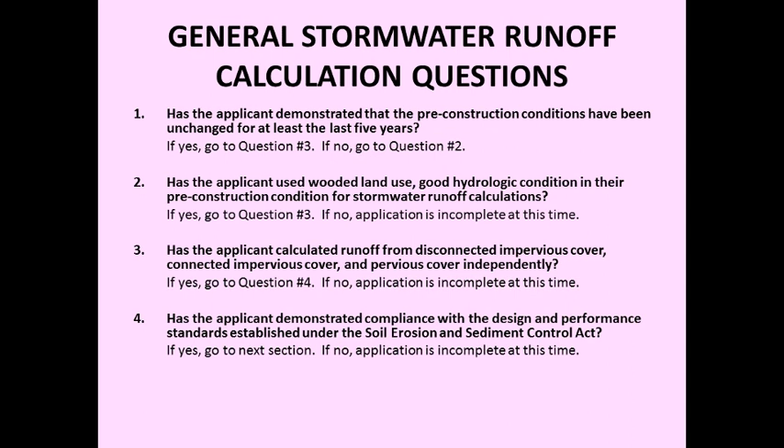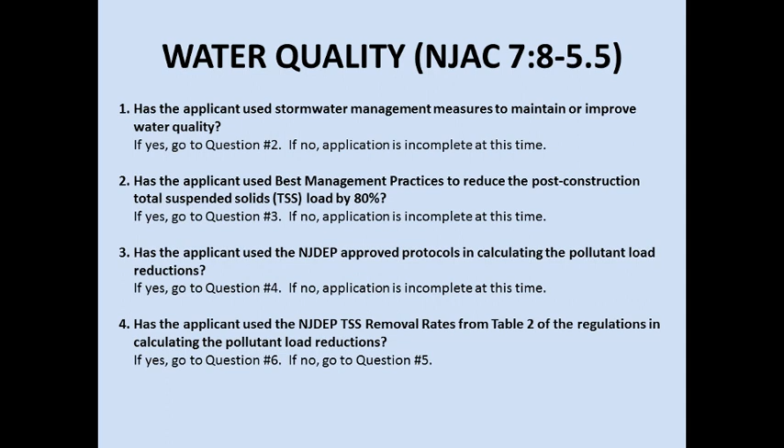So, water quality. These questions are simple: Are you removing 80% of total suspended solids? Are you using a protocol or system approved by New Jersey DEP, in other words one that was in that table? Are you designing it in accordance with the Stormwater Best Management Practice Manual? That becomes very important.

If you're using your own system, have you provided enough information to show that it also removes 80% of total suspended solids? Rarely does somebody come in with a development and say, I've got my own brand new stormwater system, I'm not going to use what's recommended by DEP. I have never seen that in my life, but there's opportunity here to do that.

Number 7 is interesting: minimum depth between seasonal high water table, infiltration rates, and a 72-hour drain time. Like I said, the infiltration rate has to be at least a half inch per hour, so that's very important. You have to have a depth of 1 to 2 feet above the seasonal high water table for your system to be functioning, and it has to be shown to drain within 72 hours. That's the time limit when mosquitoes start to breed, so they require it to drain by then. There's also soil testing criteria in the Best Management Practice Manual.

One thing we see a lot is people designing an infiltration basin that's 4 feet deep, yet doing the soil testing near the surface. So 1 foot below the surface, the infiltration rate looks great, but when they dig down 4 feet they realize it's all clay and not infiltrating at all. Yet they designed it as if it had that surface infiltration rate. So you have to be very careful about that. Hopefully your municipal engineer will catch that, but this is a question you can ask: have they followed the soil testing criteria in siting, sizing, and designing their stormwater practice?

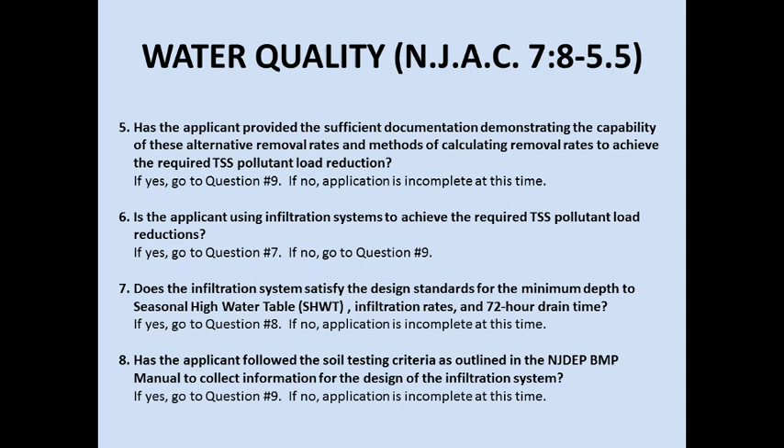Pre-manufactured treatment devices: do they meet the requirement? Are they DEP approved? Are they online or offline devices, meaning does the entire flow go through the system? That's a problem, because if you have the 100-year storm flowing through a system that can only handle the first inch of rain, it's going to flush all that sediment out. So you have to be very careful about those things.

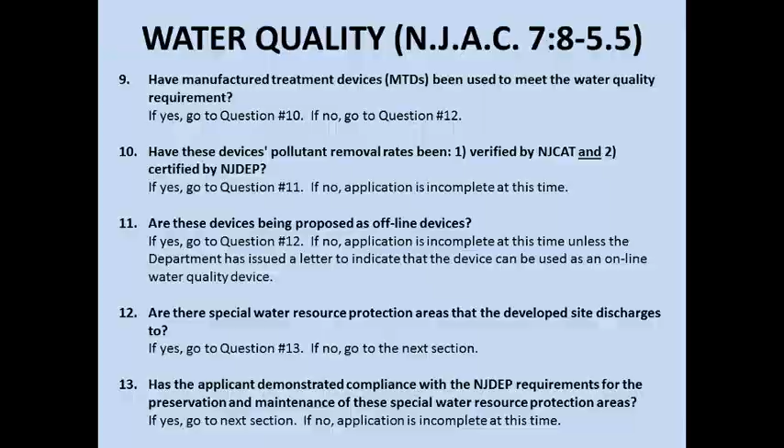There's some stuff in here about special resource protection areas. Certain parts of the state have these special areas, and you have to have those delineated and make sure you're in compliance with those regulations. Groundwater recharge requirement—now this is interesting. There's a spreadsheet that the New Jersey Geological Survey, NJGS, created. It's called the GSR 32 spreadsheet.

Every major development must complete the spreadsheet and turn it in to show the groundwater recharge before and after development. Even if they come in and say the entire site is clay, so there is no groundwater recharge, I would still ask for this spreadsheet for my files to justify that. It would protect you later on from New Jersey DEP.

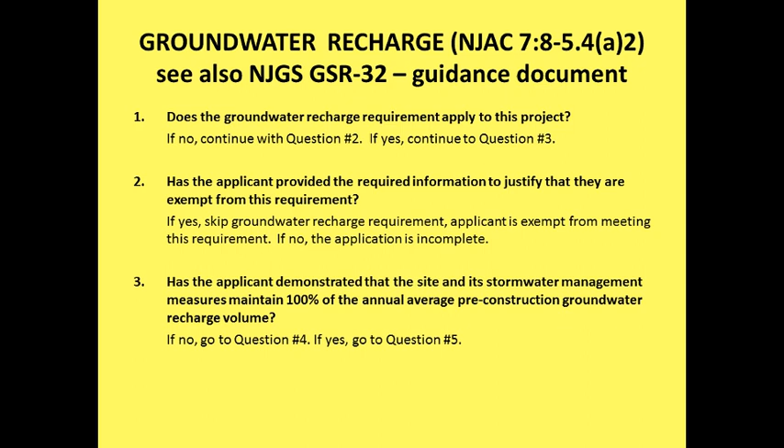So these talk about maintaining 100% of annual average groundwater recharge, or recharging the difference between the 2-year storm pre- and post-development. It also talks a little bit about whether you've avoided adverse hydraulic impacts.

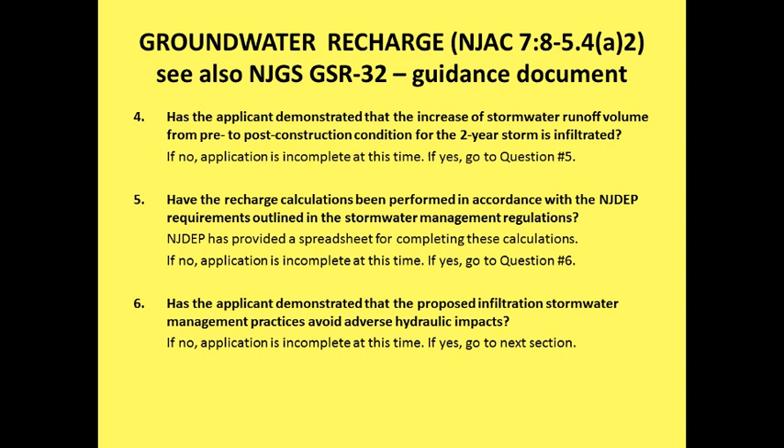In other words, if you're infiltrating in an area and water builds up underneath that infiltration system, is it going to leak into a basement or come out of the side of a roadway? Is it going to have a problem? Where's that mound of water underneath your system going to go? That's what number 6 really pertains to in this questionnaire.

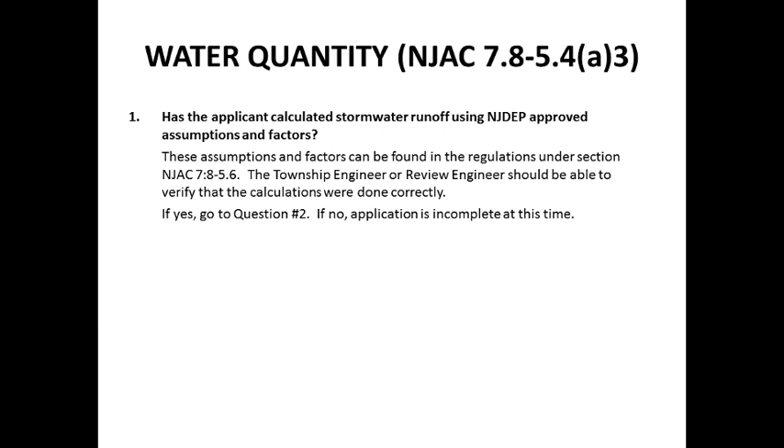So the last piece of this is designing to meet stormwater peak runoff rates. These are the requirements that we have, and they're pretty straightforward. Every engineer who's done any of this work in New Jersey understands this—they've been doing it since the late 1980s, so they understand how to do it. There's a bunch of different requirements, and C is the one that everybody uses.

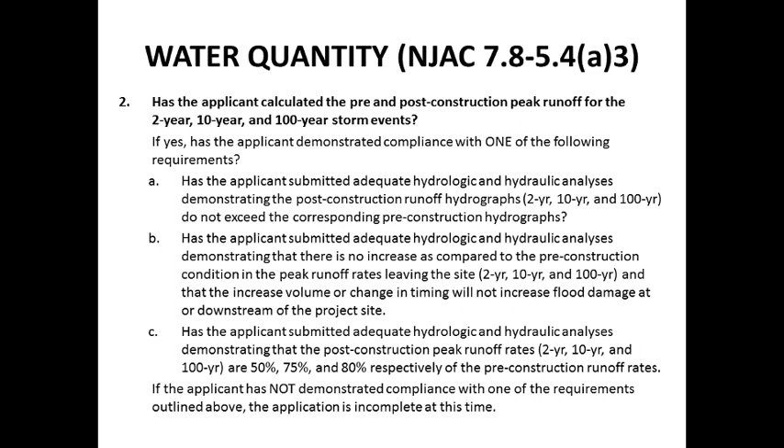Has the applicant submitted a hydrologic and hydraulic analysis demonstrating the post-construction peak rates for the 2, 10, and 100-year storms are 50, 75, or 80% of the pre-construction rate? So for the 100-year storm, that doesn't mean you reduce the peak by 80%—it means you reduce the peak to 80%. So if the peak was 1,000 cubic feet per second, then it has to be 800 after your development. It's really reducing it by 20% down to that 80% level. People get a little confused with that at times.

Then there are things in here about structural maintenance, which is kind of weird because as engineers we already worry about safety and structural stuff to begin with—it's part of our code of ethics.

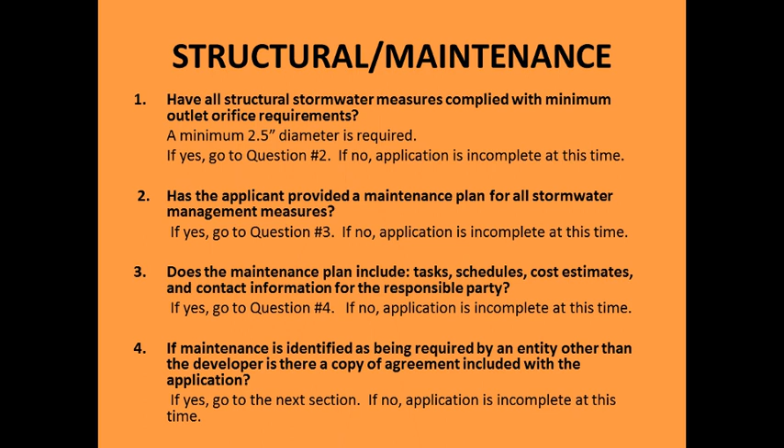Safety is another issue—having trash racks so people don't get sucked into pipes. I'll never forget, there used to be a show, ER, with George Clooney as one of the doctors. I was watching it on the couch with my wife, and this kid had fallen into the stormwater system and was trapped, and George Clooney had to jump in and save him. My wife was on the edge of the couch saying, oh my God, he's going to save this kid, and all I kept thinking was, who's the idiot who designed that? There's no trash rack. Somebody should use their professional engineering license—this is just wrong. So we already consider this stuff when we take it into account.

These regulations seem a little redundant to me because we're already required to do this ethically, but it doesn't hurt to check and make sure it's in compliance.

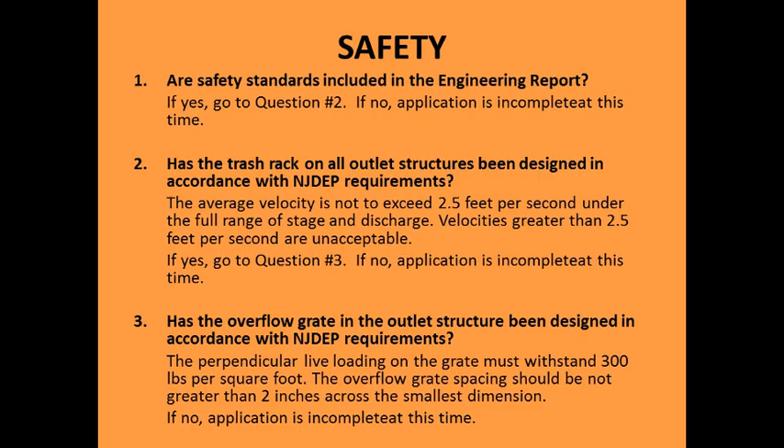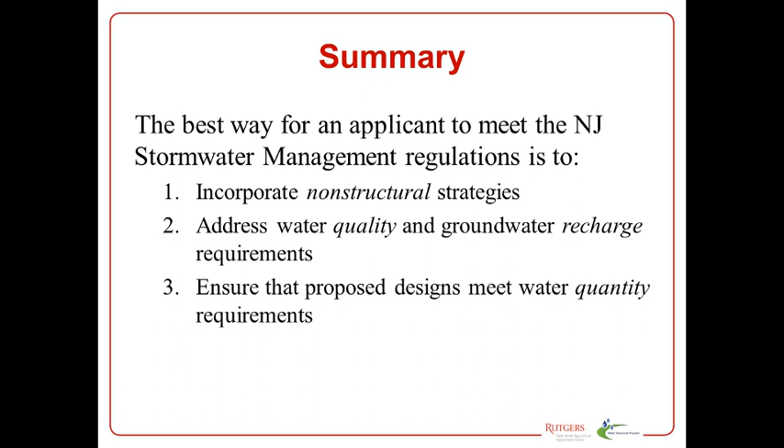So in the end, the best way to comply is: first incorporate the non-structural strategies, address water quality and groundwater recharge, and then design for the water quantity criteria. In the end, you're the only one who can approve these regulations, you as a township official—it cannot be approved by the state. So those are some of the things we have for you today.

What we've seen with this is we've had these questions. We post it on our website as individual pages, and you can print those out and use those as part of the review process.

We've had members of planning board ask select questions that they see often are not complied with, something like the deed restriction aspects of it or the maintenance plan aspects of it. So I think making sure you understand the questions and making sure that the developer has the answers to those questions and that it goes on record is very important.

That goes on record is very important, so that you can protect yourself as your liability as a municipality. So in the end, at the end of the year, there's somebody in your town who's a stormwater coordinator, and that person has to fill out a sheet at the end of the year saying that they've complied with all the MS4 permitting rules.

One of the rules is that all the developments that were approved satisfy those stormwater management criteria. So someone's signing that, authorizing that. If the state comes back and finds out that that's not true, not only is the town liable, but that individual person who signed that is also liable.